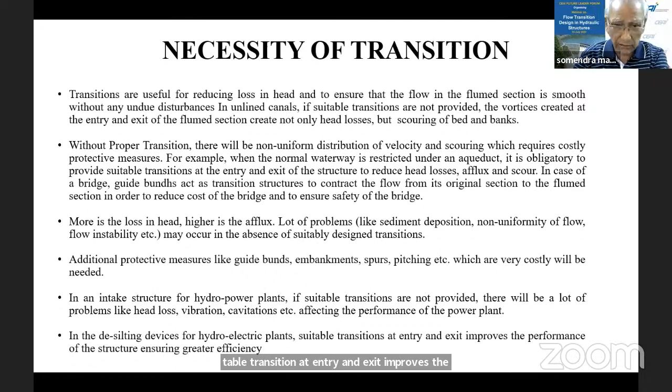Now, this figure shows various parameters like B - I'm telling you mean values, because if you have a trapezoidal channel, you can find the mean width. This is the approaching channel width, and this is the contracted width, which may be very long depending on the type of structure used. Schematically, this is the contracted width, and if it is a weir with a jump, this is the rise, and the top line - the total energy line, shown as a chain dotted line - indicates the losses. The entry loss is HLI, and the exit loss, from here to here, is HLO.

A jump may not always be there - for example, in an aqueduct you will not have a jump, but in a fall structure where fluming is required, sometimes there will be a jump. So this is the velocity head, and this is the normal kinetic energy corresponding to the normal depth. So the afflux is this level minus this level - that is called afflux. This is a schematic diagram.

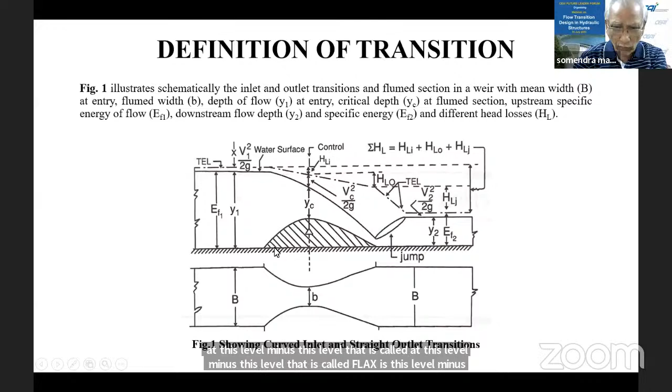Now the next figure - these are basics I'm explaining - energy has two components: one is called Y, that is the potential energy or depth.

Another is kinetic energy, V squared by 2g. If you replace V in terms of Q by A, then for any channel you can show this graphical representation of the equation. If you take the solid line, with more discharge the curves shift to the right, and with less discharge the curves shift to the left. This is called the specific energy diagram.

For a minimum specific energy E, there is only one depth, and the locus of that point is called critical depth. Any flow other than critical has two alternate depths: one is called supercritical, with low depth, and the other is subcritical, with very low velocity and high depth.

Anyway, I don't want to go more into the theory of this.

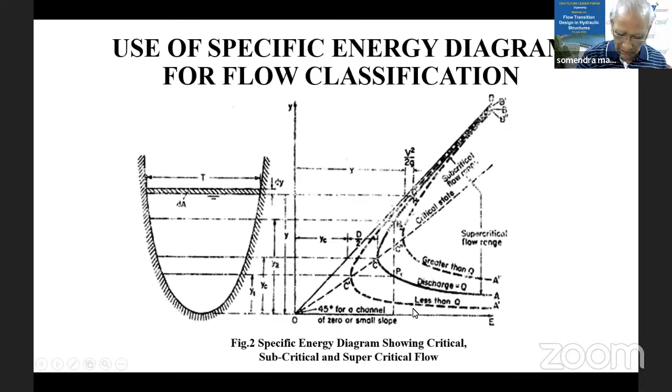Classifications: open channel transitions can be subdivided into three groups as per geometry. First, by changing the width without changing the bed level, that is, changing in the horizontal plane only, like Venturi type flumes which are used for measurement of flow, or aqueduct transitions where there is no rise in bed, only plan change.

Second, by varying bed level without changing the width, such as in spillways, which may be contracted also. Third, by simultaneously varying both bed level and bed width, as I showed you in figure 1.

Transitions may be further subdivided according to flow regime or flow condition, that is subcritical or supercritical flow, as I illustrated in the previous figure.

Now I am discussing only transition from subcritical to subcritical flow, with a little note at the end. I will give an example of subcritical to supercritical flow with a hydraulic jump at the end. I have written a book on this subject, transition design, same flow transition design, by Taylor and Francis, but it is quite costly.

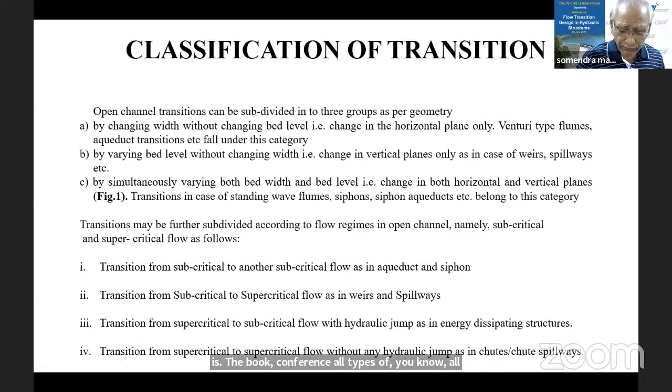Now, these are the different shapes. Most of these curves may be a circular arc with radius r at the entry, and these are given at the exit.

If you make the direction of flow this way, it will be the entry, and this will be the contracting transition. If you come this way, then it is the outlet transition.

So instead of circular, you can have an elliptical curve, an oval shape, tangential at the exit and tangential at entry also. If this is the flow direction, this is the inlet; if this is the flow direction, this is the outlet transition.

This is called wedge-shaped transition. Normally channels are trapezoidal also. You start from a rectangle, and the structure is mostly rectangular, like an aqueduct. When you go this way, inlet, it will be from a trapezoidal channel to a rectangular channel.

These are called wedge-shaped transitions. Now, in abrupt transitions there are also many possibilities: this is abrupt with an inclined wall, this is a sudden or abrupt one, this may be with a side wall, or this may be a rectangular wall. So these are various types of transitions.

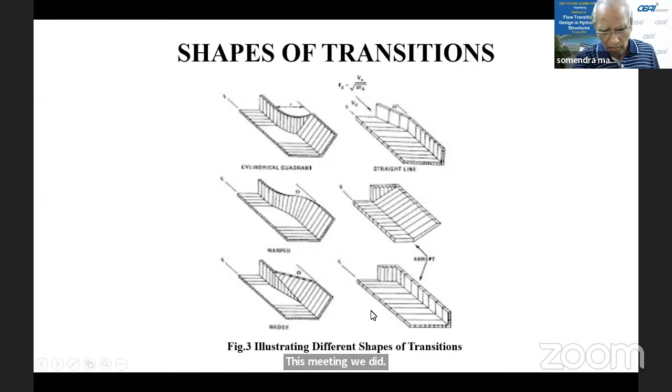Now, Hinds designed this transition in 1928. He made a hypothesis that the water level in a transition under subcritical flow only is composed of two reverse parabolas, which can be used for determining the plan shape. This design is very popular in the USA and all European countries.

But these are very costly. The axial length, when I say length it doesn't mean the curve length, it's much more, and they have retaining walls which are quite costly. This length is about 5 times the offset, offset being, say, this to this much, 5 times length.

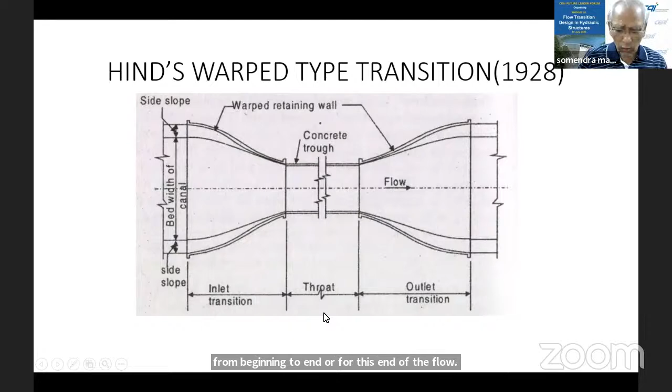Now, when I started working on this subject, I found there is really no guideline on how to decide how much you will flume. For example, in the IRC code also, they say the breadth can be constricted to such an extent that the afflux will not be harmful.

Now, what is harmful? That they are not defining, or no degree they are giving. So this detail I don't want, but it was published in the Journal of Fluid Mechanics.

So the ratio B0 by B1, that is the fluming ratio. B0 is the flumed width, and this I am calling only mean value. So this ratio can be expressed as a function of F1.

F1 is the Froude number at the entry, and F0 is the Froude number at the structure, that is in the flumes. Where F1 and F0 is nothing but V by root Gy, that is root GD. So that is called Froude number. This function can be derived from fundamentals.

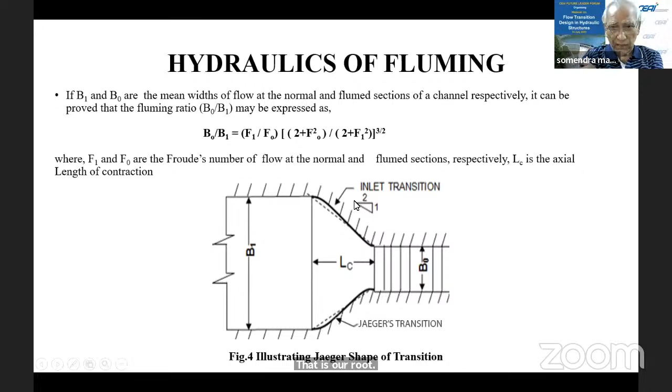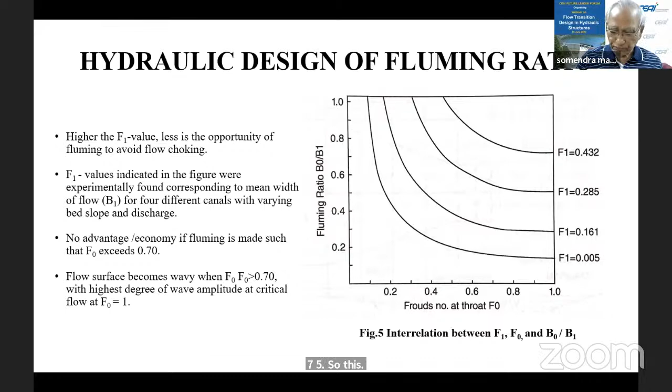So this method was published in this paper. Anyway, now, these are the developments Hinds developed in 1928. From time to time, USBR also gets some - there is a book for USBR. Jaeger developed a beautiful equation.

Velocity function - he chose this A value and phi value. Phi is defined as this. On the y-axis is the depth, which Hinds has shown as reverse parabola. He said it varies like this function. So phi is 1 minus A, given this, and then from this continuity equation you can find out the depth at any place, and then the corresponding width.

Phi is pi x by L - yes, phi is pi x by, because it is my very old work. So anyway, still have it. Kulandwaiswami did some work - he worked before me, I went to IIT. Before that he did some work on transitions.

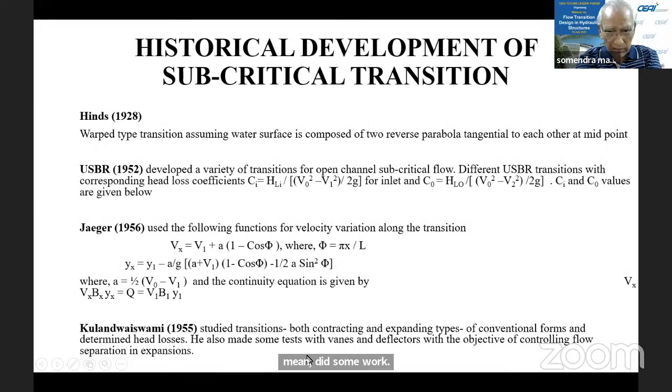Similarly, Chaturvedi has a very elaborate set of equations, alpha like that - that is a very popular transition formula, showing at any distance x, how the width will vary. This relation between y and x has been used in almost all hydraulic structures in UP - they call it Chaturvedi's expansion, contraction, like that.

Smith and others developed certain baffles to use, but there is considerable head loss in baffles. In 1967, in my MSc work, I tested both contracting and expansive transitions. My work was mostly in contracting, though I did expansive too, I think - I don't remember, it's old now, 33... 56 years old. Anyway.

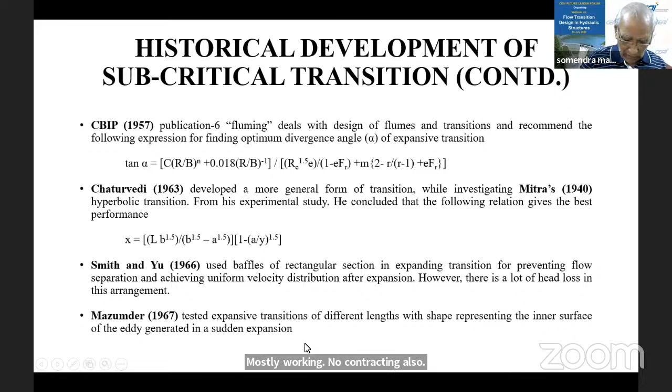Now, Ishbash and Lebedev assumed that, for example, in a spillway - an Ogee type spillway or dam - the spillway shape is determined by: if you have a vertical notch and the water flows freely over the notch, the locus of the lower nappe will give you the profile of the Ogee spillway. Then there will be no separation of flow.

That type of concept he took for the transition - that if there is a sudden expansion, eddies will form. So what is the boundary? If we take that concept from the vertical plane and apply it in the horizontal plane, what will be the equation of that separation surface? That is given by this equation. I used that equation for expansion.

But first, in my master's thesis - and the tan theta is, of course, the angle given. Then myself, with Professor Rao, who was the head of the department, and he supervised my work - we did a lot of work on stabilizing the flow and improving the efficiency of expanding transitions. So I told you about that. These details are given not only for subcritical to subcritical, but for all types of flow conditions.

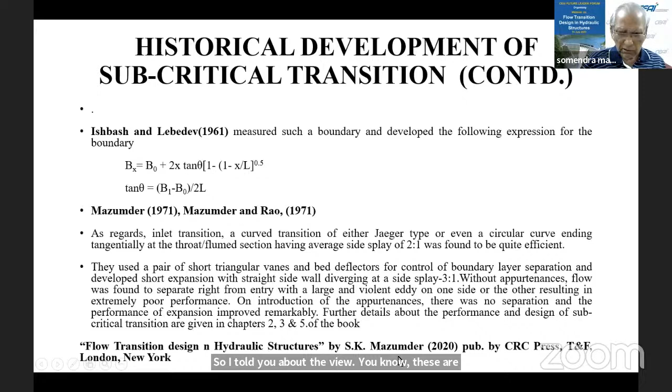Now, this Ahuja, he was my student at master's level. So he tested Jaeger. He made very beautiful work, I have papers with him, one or two papers we have written together.

So in the loss equation, Ci is the coefficient of inlet loss, which can be expressed as HLI, that I showed you in the first figure. And that can be expressed as 1 upon eta, what is called inlet efficiency. So Ci, the coefficient of loss, and eta I are related. You can see that higher the value of eta I, lower will be the Ci value, or the opposite.

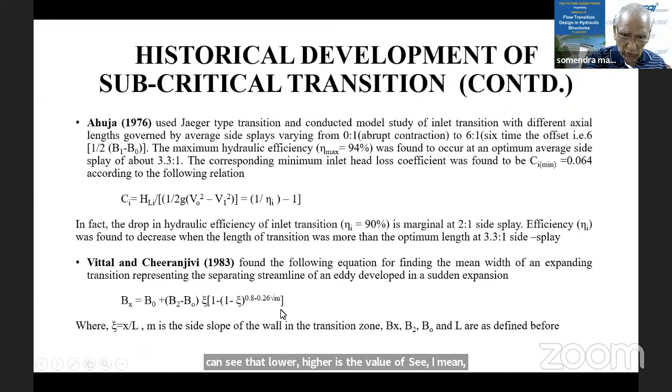Similarly, Vittal and Cheeranjivi have also used a function to determine the transition shapes.

Now, coming to flow characteristics in subcritical transitions. In contracting subcritical transition, there is a fall in water surface, as you have seen in figure 1 — the water surface level drops. That is in subcritical flow; supercritical is opposite. Therefore, the transition design in supercritical flow is not so easy.

I worked 1 year in a Swiss laboratory. They invited me because they said they recognized my work on subcritical transition and asked me to come and work there. So I did 1 year of work, and with myself and 2-3 other people, we had about 4 or 5 papers in ASCE and IAHR, which are international journals.

Anyway, pressure distribution — this is only for subcritical flow — is non-hydrostatic due to curvilinearity of the flow surface. Velocity distribution is non-uniform, as the flow is 3-dimensional, with varying resistance at the bottom. Additional complications arise when the main flow separates from the boundary, resulting in backflow and eddies.

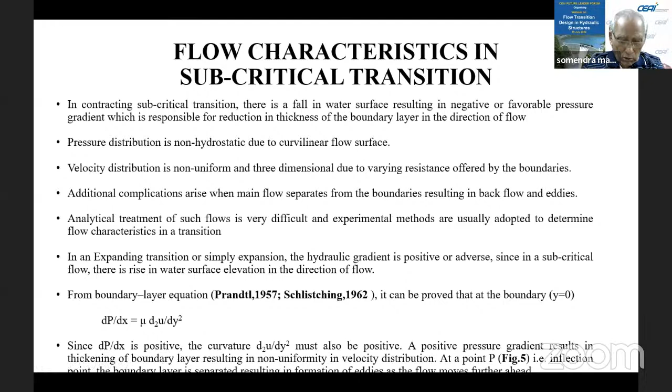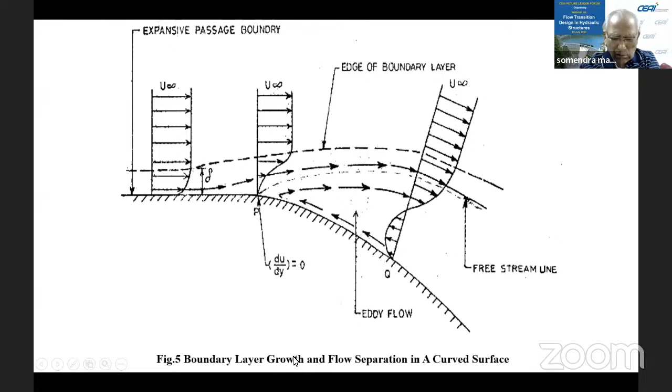This occurs under the influence of the positive pressure gradient. So hydraulic analysis of expansion in subcritical flow is more difficult compared to contraction. In subcritical contracting transition, pressure energy is converted to kinetic energy, and the process is stable. Whereas in expanding transition in subcritical flow, kinetic energy is converted to pressure energy, which is an unstable process. In an ideal transition, there should be minimum head loss — higher the head loss, lower the efficiency of transition, and vice versa.

Based on the above concept, it can be proved that the efficiency of contracting transition eta I and the expanding transition eta O can be expressed in terms of the coefficient of head loss. People in the US designing these have used only CI and CO.

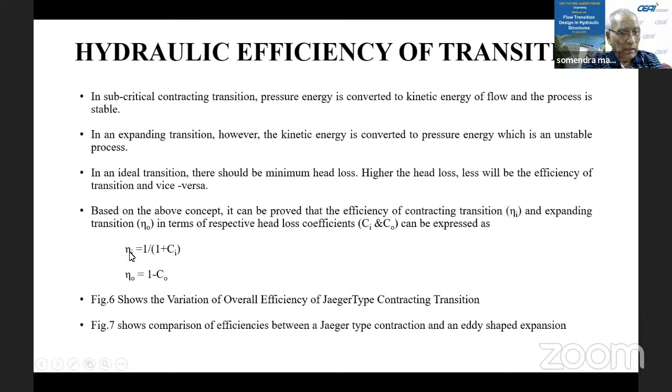So now eta can be expressed as 1 minus CO, where CO is the outlet coefficient loss. Higher the loss you find, lower is the efficiency; lower the head loss, higher will be the efficiency. So for this, I have got two figures.

Here you've got a contracting transition. This is called the average axial length of transition, 1:1. You see the efficiency is poor, but if you come to around 3:1, it is very high. Maximum efficiency of 94% occurred at about 3.3:1, and the minimum corresponding CI loss was at that point.

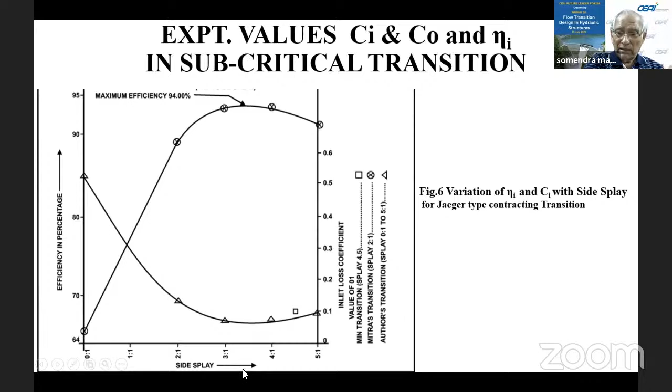In all these transitions we tested, like the Hinds transition, there is an extent of separation, and the distribution of velocity at the exit is highly non-uniform, thereby resulting in scour. If the flow doesn't diffuse over the whole width, the mean velocity will not be what we assumed in the design of the canal. Somewhere it will be even 2 times, which will cause scour, or on the other side, it may be unstable, and the whole jet may go that way.

Then there was Mr. Rao, when he was chief research officer at Poondi Research Station. He developed a wedge-shaped expansion of a certain thickness which diffuses the flow, but he didn't develop any design procedure for it. That was not there.

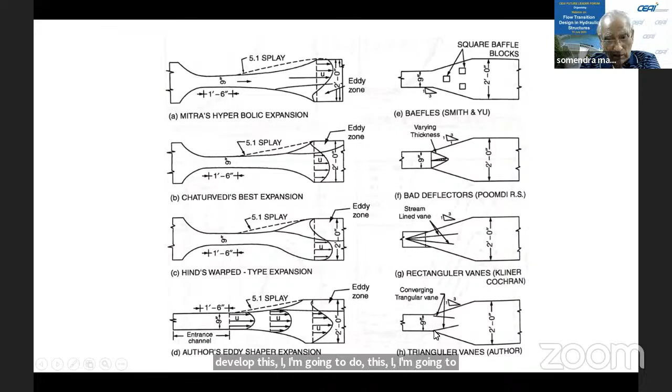They are all devices, and we developed our own. I developed triangular vanes in my PhD work. I will just discuss how this was done - this was the work at the PhD level.

Now this is a comparison of efficiency I told you about, for the Jaeger inlet transition. Optimum axial length is about 3.3, but even if we make it 3:1, hardly there is any change. I recommend that even 2:1 is sufficient, because there's hardly 2% loss in efficiency. It doesn't matter, but beyond that, if you make it longer there will be heavy additional cost.

In expansion, the maximum efficiency - this is only true for the eddy-shaped or east-west logarithmic curve which I tested - comes at 8:1, because I had to make so many models up to 10:1 or 12:1. Anyway, the maximum head loss efficiency occurred at 8:1. So you see how much is the cost of the experiment, that's why we thought of that.

As far as contraction design is concerned, you can adopt any curve - it may be elliptical or other, but it should be tangent at the entry to the flow. That's because in a high velocity area, you should not have an abrupt contraction, as that will cause more losses. The Jaeger transition was a very, very good transition that we recommended.

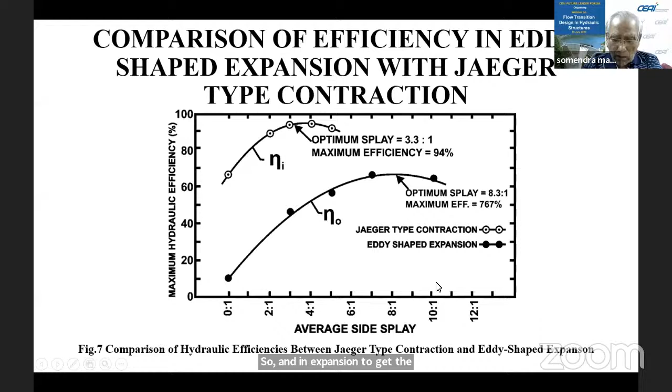Here I want to discuss a little bit about what is called the jump type - this is of course not for an aqueduct. In a canal fall, the water comes with a high velocity, these are on the contracted position, and the hydraulic jump occurs up to this point.

This is the end of the basin. Up to this point, the sidewalls are parallel, and the jump occurs, and the flow diffuses because of the roller that helps in diffusing the flow after the jump, and then the normal depth occurs.

This is actually the ideal thing: if this is the energy loss, the total energy loss from beginning to end, that is the upstream energy line to downstream energy line, which is the summation of head loss at entry, exit, all these things.

This is the transition portion. So if you have this type of basin, meaning the energy loss is represented like this, and the energy line is this, then all losses required in the jump are dissipated, and you will have normal flow right from the exit of your structure. But it doesn't happen that way—the actual energy line looks like this instead.

That means the kinetic energy flows from here to here. That is called the hydraulic jump length, energy length, that much. So the residual energy is this much.

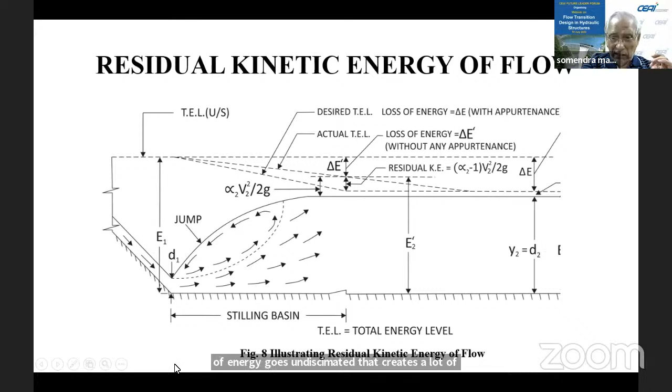You see here, the same flow in a channel may pass either as a rectangular velocity distribution, or this dotted one. The mean of the two, that is the area under the velocity diagram, is the flow per unit width. So with the flow remaining the same and the depth remaining the same, the only way the residual kinetic energy can be contained in the flow is through distortion.

This also I have papers on, 2-3 papers published in very reputed journals. So there will be backflow and concentration of flow—this is in elevation and this is in plan. There, the flow is same, the depth is same, but a small amount of kinetic energy remains.

Recently I read a paper from Misr, Egypt. There are several barrages in several places, and they noticed a lot of scour after the barrage. So I wrote a discussion of 3 pages, stating that this is all because of the residual energy.

Because in a barrage, when there is lean flow, they open one gate, or it's a bit hard to open two gates, out of 20 gates. In the model tests, they made 10 gates. When only 2 gates are opened, they found the scour is very high. And when they open 10 gates, the scour is almost nil. So they couldn't find the reason.

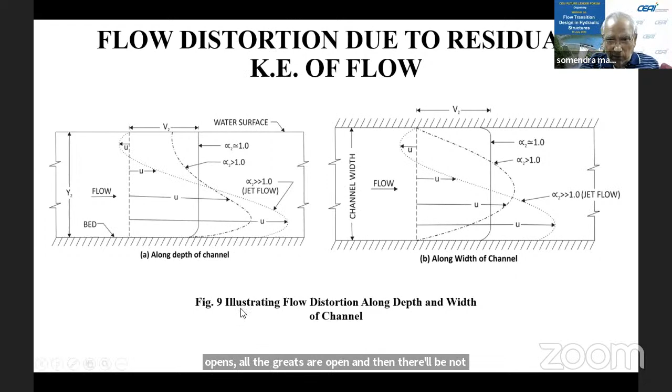Now, the experiments we conducted in a very big flow facility, because those facilities are available in IIT, so I'm not going to show you that. But here in Delhi College of Engineering, to understand the flow behavior in an expansion, you can see this portion—the contracting portion was fixed, and these two were hinges.

So what could be done? I could control this width, this is the channel wall, to B0 or capital B—same thing. This diagram shows B0 meaning small b, and this is 2 small b. Anyway, there was a mistake here; only this is small B0, meaning 2 small b.

This angle is called the total angle of expansion; half of that is also referred to. So what we did was test how—supposing I bring this point here, the width automatically becomes less. The study objective was how the expansion ratio, that is small width versus bigger width, as well as the rate of expansion, that is the length of the wall, affects flow stability and losses. So I will show you.

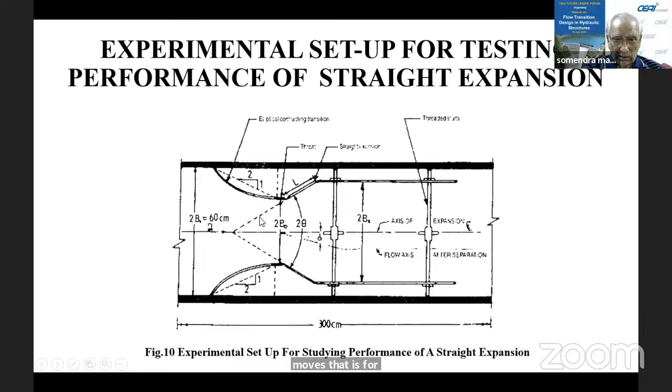Because velocity distribution normal is also like that, the maximum velocity will occur, then it is a very good case. But if the maximum velocity locus moves, that is called delta, and L is the length. This is the B and this is the small b.

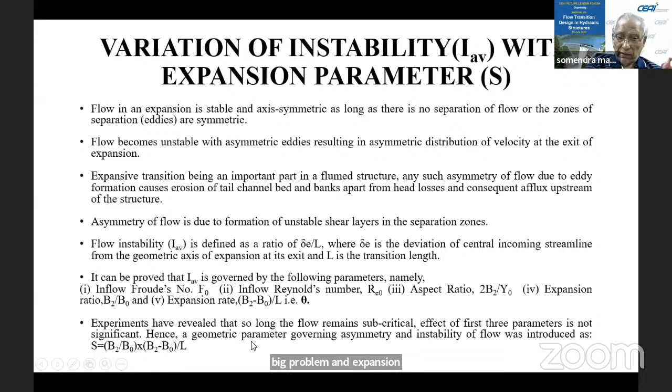So we found these are only to explore the eddies, how they develop and disappear. We found that the four parameters which are very important are Froude number, Reynolds number, aspect ratio, and the expansion ratio and expansion angle. The first three parameters don't have much effect. We concluded it is the expansion ratio, the fluming ratio, the same thing, and we did it for expansion only because expansion is a big problem, and the expansion rate at which you are expanding.

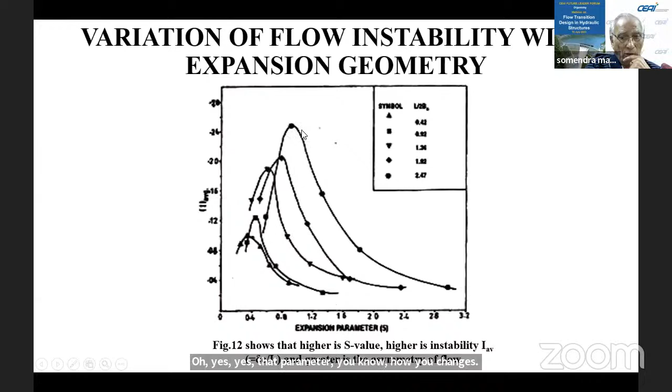So these two parameters we explored further and found how the instability changes with expansion. This is L by 2B0, the expansion rate, and this is S, that parameter, how it changes. You see this change, the maximum occurs somewhere here. In the next figure, you see how the efficiency varies for various expansion rates and angles. If the angle is more, the efficiency is very small, and it will be maximum around 10 to 15 degree.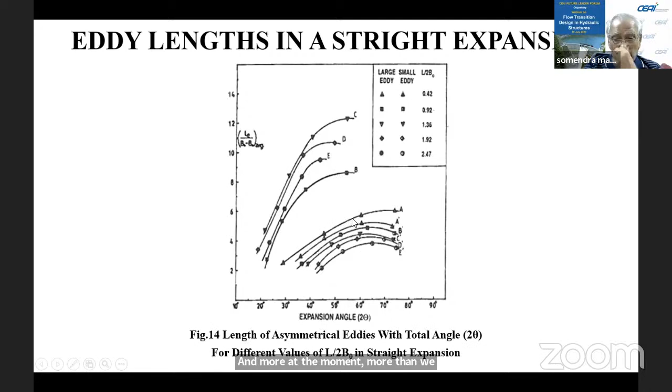Now these are studies made in a diffuser. Diffuser means, in case of a tunnel type closed conduit flow. This is the work of Kline, who did a lot of work on this.

He found that below this line, the flow cannot separate. 2 theta varies from 20 degrees depending upon this value, that is rate. He found this, and these are called transitory eddies. In that region, it is fully developed eddy, and this was for closed conduit pressure flow. But in open channel flow, we found almost the same thing, though it varies depending on flow velocity and discharge, but more or less the same regime occurs.

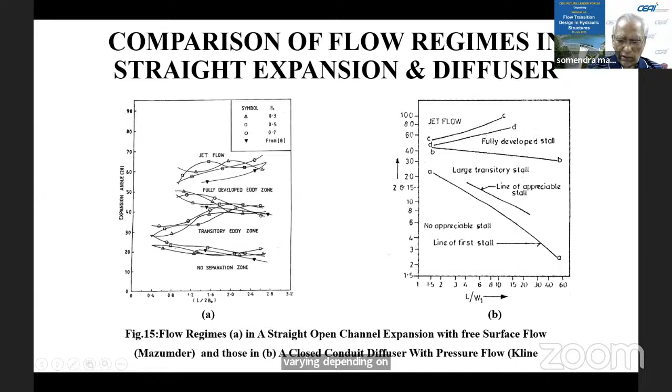Now, for economic and efficient design of contracting transitions, an elliptical or contracting elliptical quadrant, or cylindrical quadrant shape with center lying, or curved line on the entry tangential to entry at the throat section will suffice. A trochoidal curve is one which you can generate if you have a bigger circle moving, and within that you draw a small circle, and if the outer circle rolls on, then that inner circle will develop a curve which is called a trochoidal curve. So they are quite sufficient, not because of very small flow.

Performance of contracting transition by Jaeger's type curve profile, which is tangential, and that equation is very powerful, and we found that it is very good. This was done by Mr. Ahuja. So it was 94% at 3.3:1, and hardly 92% at 3:1 to 2:1. It varies from 90 to 92%. So we have recommended that you adopt a curve of Jaeger's type or any other. It depends upon you, but there is no need of making 5:1 or 6:1. It's not needed. It rather reduces efficiency.

Then some small amount of flow separation occurred at entry with the contraction when the length is shorter than 2:1, resulting in head loss and fall in hydraulic efficiency. It is therefore recommended that average 2:1 may be adopted for the subcritical transition of Jaeger type profile. A longer length defined by an average side splay of more than 3:1, on the other hand, is not only costly but hydraulically inefficient too. There is no need of providing such a long transition as recommended by Hinds.

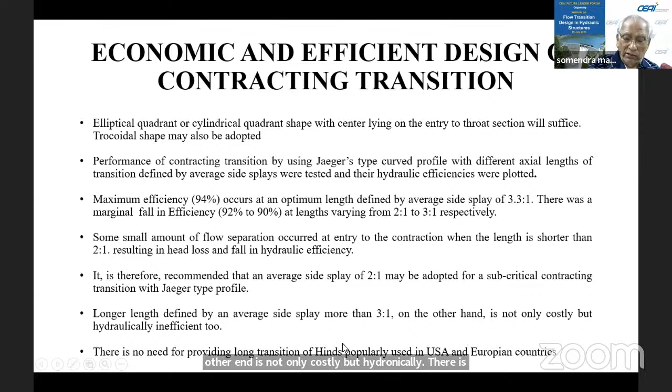Performance of classical expansion: in my PhD work, I concentrated mostly on this expanding transition. An exhaustive study of eddy shaped expanding transition using Ishbash and Lebedev type profile was studied with different axial lengths varying from 1:1 to 10:1, as I have shown you earlier.

Performance of expansion were measured in terms of the following parameters: hydraulic efficiency, eta O, and the Coriolis coefficient alpha, which indicates the distribution of velocity. Alpha equal to 1 means completely uniform rectangular distribution, and alpha equal to 3 means highly non-uniform. In case of a hydraulic jump, if you take within the jump region, it may be even 40-50. So this is an indicator for the distribution of velocity.

Then another parameter is the standard deviation of actual bed shear distribution with respect to normal bed shear. If the velocity distribution is uniform, you will get a bed shear, because the distribution of velocity and bed shear are related. So that parameter is called sigma, and smaller the value of sigma, the better it is preferred.

In fact, you can see in this case, if C0, or coefficient of velocity, efficiency is almost 100%. And U cube dA by A V cube, where A is the total cross section and V is the average velocity, and U is the local velocity. Now if U is equal to V, then it becomes V cube, and V cube will come outside, and because this will be cancelled with this, and integration of dA is nothing but A, so alpha will be 1. So our attempt should be to achieve 1; even in normal flow, it will not be less than 1.07.

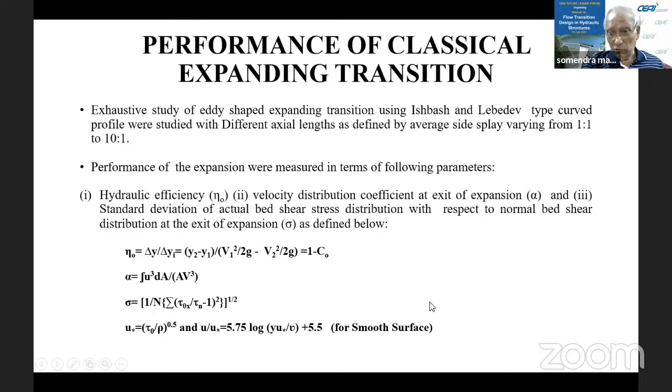Performance of classical design - how much time have I taken? It is 12:30, I started at 12:05. Oh sorry, my time is over - one hour. Okay, I'll quickly glance through.

Such long length is not only costly, it is inefficient too, since the hydraulic efficiency is very poor and separation at exit and non-uniform distribution occur. The design for subcritical efficiency is found to be 75. I told you all these things.

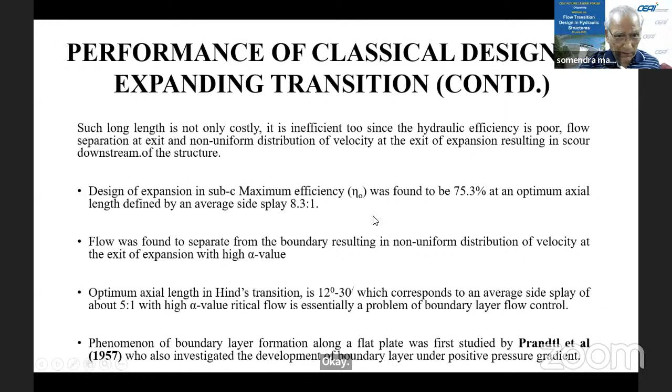This I think I can skip. Then boundary layer flow control devices - that also I forgot. Now this is the triangular vane.

I will just show you since time is over. So this I have already chosen. These are the experiments from which we can determine it.

Without the vane, look at the shear stress distribution - how concentrated, there will be a lot of disturbance. With the vein, they are controlled. This is the separation without vane, and this is with the triangular vane.

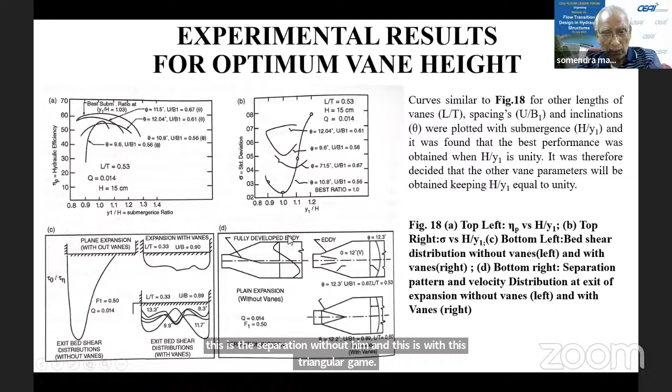This is the standard deviation - just one typical figure. These curves can be used for determining the discharges, and this is for determining the length of the vane. From the point of view of efficiency, they are almost where the efficiency is maximum. I have seen the standard deviation is also minimum there, so that satisfies the relation.

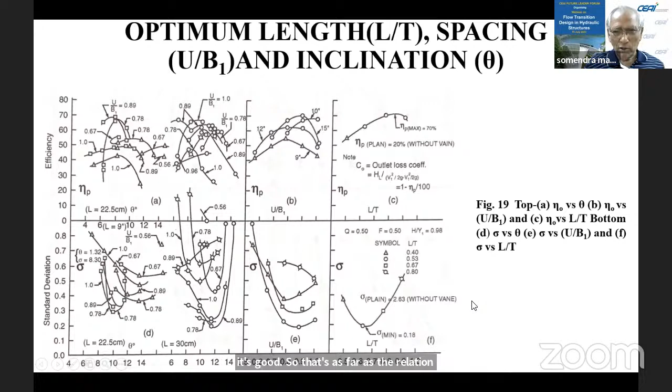From such studies, I don't want to go into the depth - these are given in detail in the book. Here are the design curves - the question is how you design. In the book I have given model discharges and model Froude number, but you can convert it to the prototype discharge for large applicable discharge.

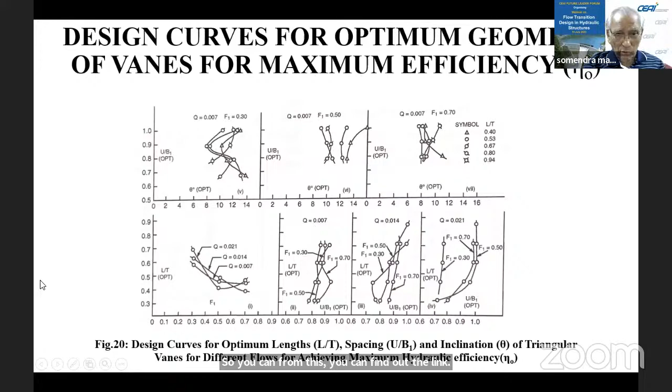From these curves you can find out the length of the vanes - I'll show you this. They are not attaching the wall, there is a small gap. So U is the distance from the outer edge of the vane, say the concrete vane, measured outer to outer. So it is not exactly small b.

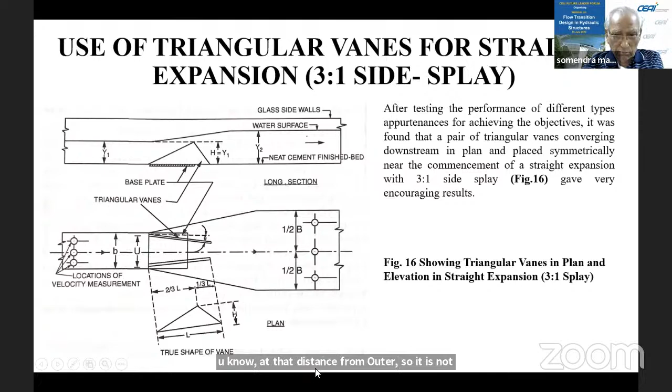These curves help in determining the design parameters. This has been compared as to how this ends. So these are all classical.

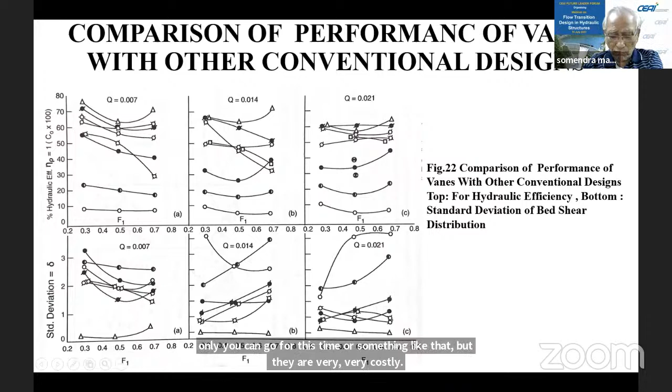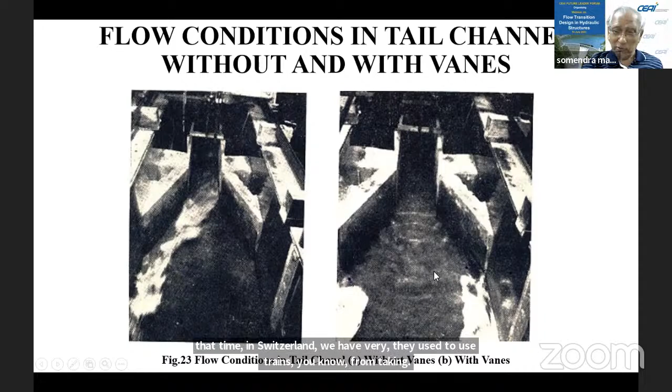I told him to take the photograph afterward but he couldn't take it, because photography at that time in Switzerland - they used cranes for taking photographs. I took it myself - you will not get any help, you have to do everything there. I was much younger then.

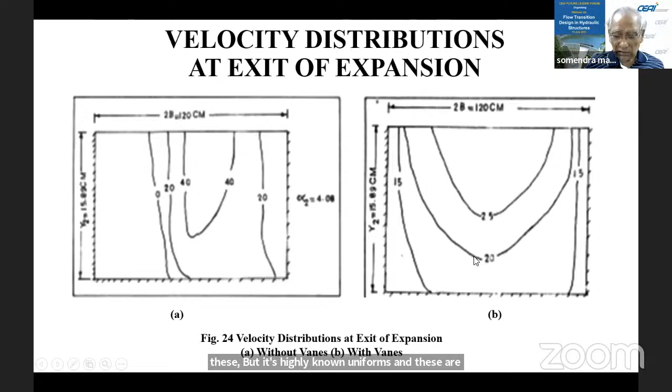We presented the paper at the Institution of Engineers India. I was the main author, and Professor Rao the second author. We got the gold medal for our work from the Institute of Engineers.

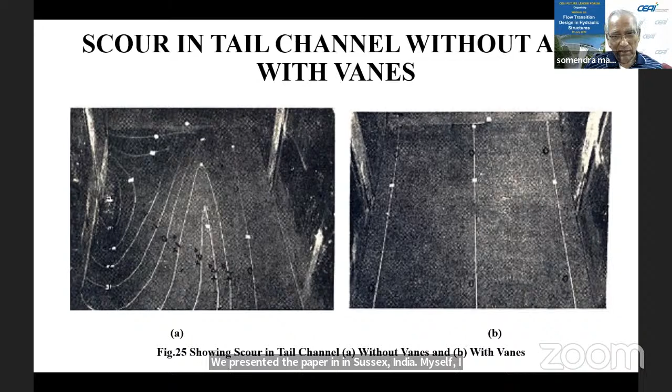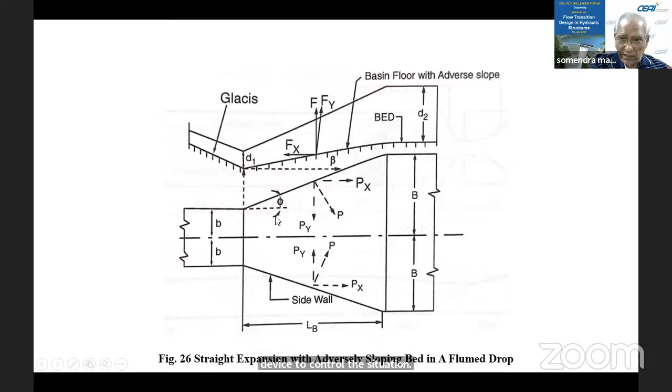This concept has another application. At Delhi College of Engineering, after I joined as professor of hydraulics and flood control, I used another device to control separation. In any expanding section - how does it differ from where a hydraulic jump occurs, where the stilling basin is straight up to the end of the basin? So it will be straight, but here it is different.

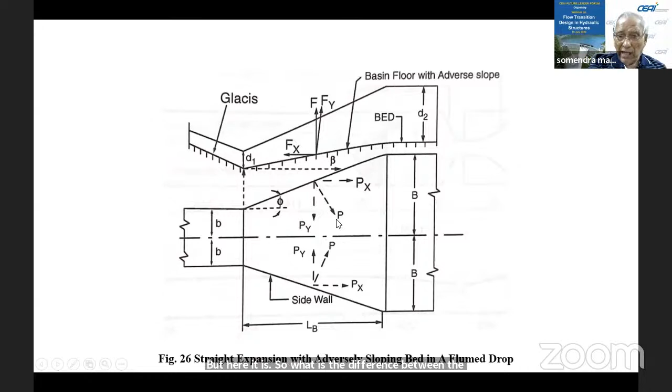So what is the difference between the straight wall and an expanding wall? The difference is this: if you take the reaction, that is the thrust given by the wall, from the momentum relation, you see that P has two components, one forward direction and another normal. These are cancelled on the two sides, but this Px and this Px add. So the forward force acting on the free body diagram will be 2Px.

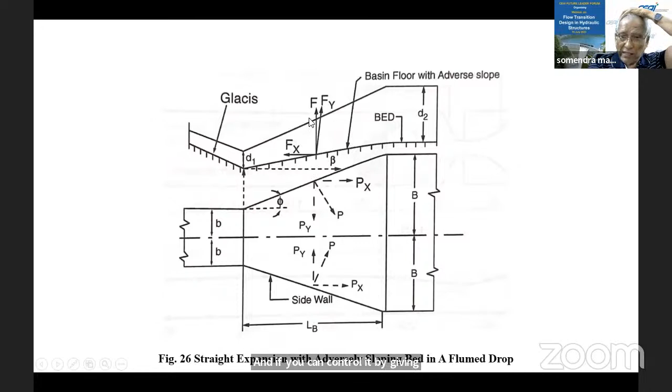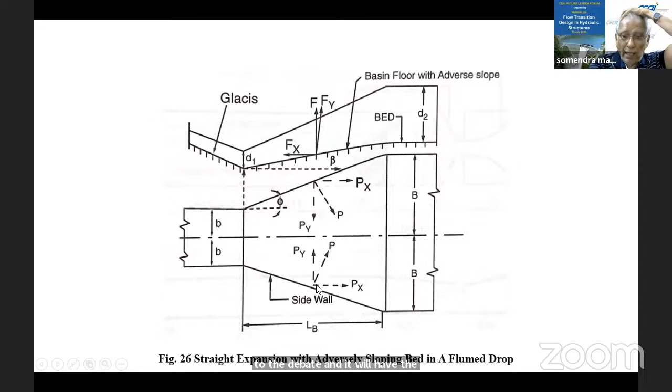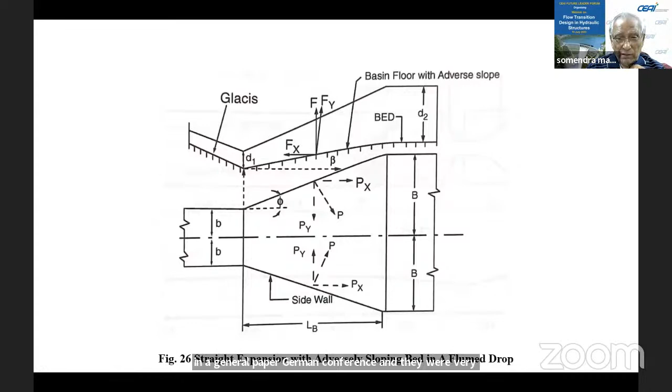And if you can control it by giving an adverse slope, because adverse slope reaction will be F normal to the weight, and it will have Fy and Fx. So if we can make Fx equal to 2Px, let us see what happens. We got that published in a German paper, a German conference, and it was very much appreciated. So this concept, we derived this equation and the values.

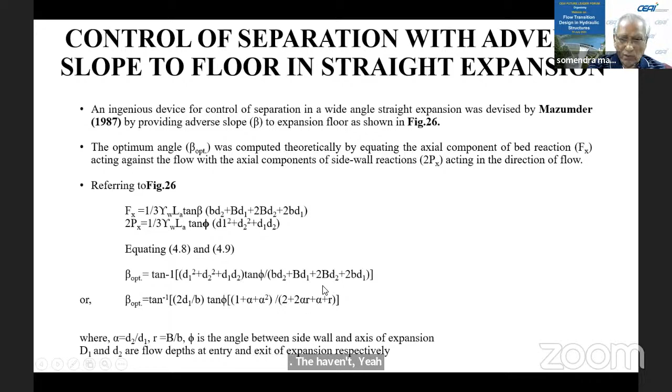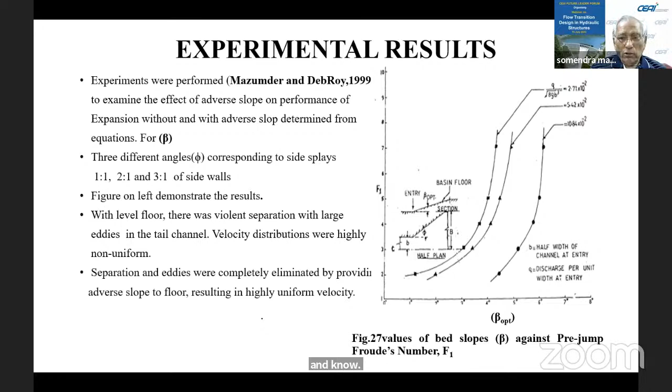One chairman, Central Water, retired, he wrote me a personal letter: Dr. Mazumder, your paper is excellent, and we want to further test it. I said you can test it because they have access to big laboratories. After all, flumes in laboratories are limited, so they can be tested on a prototype, or in small canals. There is nothing wrong in that, because in doing anything new, you should be very sure that it works.

So what is the economy? In a traditional canal fall, this wall will be the same length as this. But in my case, the solid line is the recommended design: you take a very sharp contraction, 2:1, then you have, say, an aqueduct or any structure, and have an expansion of 3:1. But in the classical design, you have to make this wall extend further, because the jump should be controlled, otherwise the jump will become spatial, and they do not know how to design for the spatial domain.

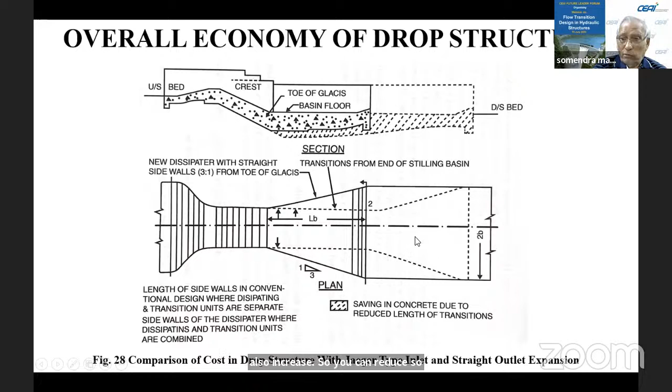I have got the method. So anyway, up to this point, then a transition, if you contract, look at the cost of the structure, this thickness also will increase. So you can reduce so much cost in the walls, the retaining walls. So much cost savings. I think that's all.